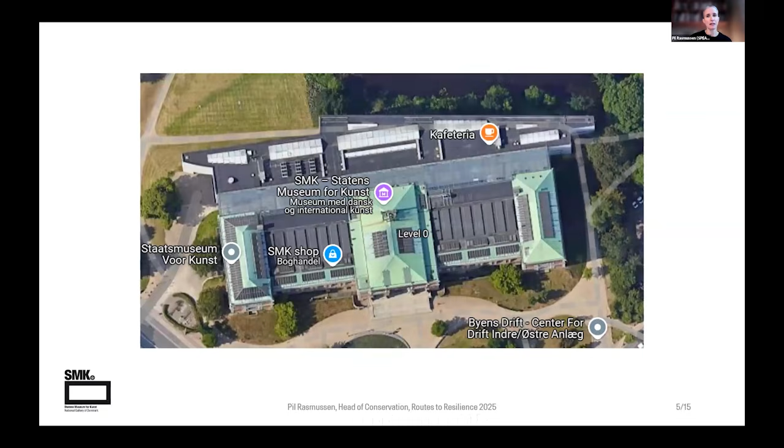I've also included a view from above. What you see here is the original building, which is quite a classic kind of museum building from this time in Europe. These two areas used to be a light well, or a sort of internal courtyard, and they've been covered up around 1970 to make more room for display.

This is the new building. You can see the lake here at the top, and connecting the two buildings is this glass-covered street, which is essentially a greenhouse. I'm mentioning this because in a minute I'm going to go into some climate control readings from experiments, and you will see that our main problem is keeping the temperature down. The building is not very well able to be cooled down because of all the joint building mass we've added over the years.

Briefly going over the sustainability efforts at SMK, we have followed the Bizot guidelines and the ICOM-CC and IIC recommendations from 2014 for around 10 years now, widening the environmental parameters for our own collection. We are also urging lenders to accept the same. This year, right now, is actually the first exhibition we've had with external loans coming in where we were able to get all lenders to accept these wider environmental parameters. So it's taken us 10 years from when we started this work with our own collection to being able to do a special exhibition with the same parameters.

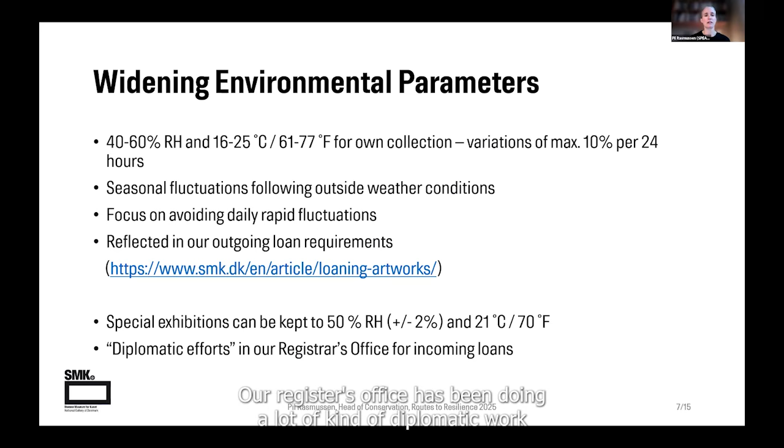Our registrar's office has been doing a lot of diplomatic work for incoming loans over the years. The Getting Climate Control Under Control program that I mentioned before.

We took part in this program because the Danish Association of Museums, part of their secretariat is the Green Museum Academy, who work to help museums work more sustainably. And they have been working with Ki Futures, the International Coaching and Training Network for Sustainability, to try to help museums overcome the barriers for making a change towards more sustainable climate control parameters.

There were 10 Danish museums participating in an 18-month project, and I believe this is also going on in other parts of the world at the moment. Our project is finished now, but we're working still internally in SMK with all the learnings from that.

We did have some barriers to how we could work along the way because we had an arbitration case surrounding a refurbishment of our HVAC units. We couldn't touch the system controls and programs for that, but we could do shutdowns of the units. We did that in 2 areas.

One was 6 connected exhibition rooms, and one was a storage room. So the 6 rooms were serviced by one HVAC unit and the storage room by another.

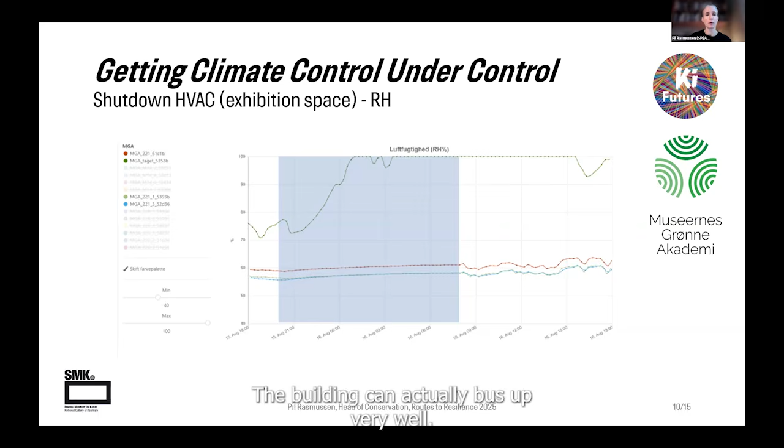I want to also emphasize some of the barriers that we've met in working with this. The first one I want to mention is the lack of resources, obviously funding for purchasing data loggers, equipment, whatever, but also a resource in terms of staff. Working with this requires time to look at all the results, to consider, to meet, to discuss and agree on how to move forward.

A barrier could also be documentation, or a lack of documentation, of historic climate conditions in the building. Another barrier could be just trying to work against the building, trying to make it do something it's not suited for, for instance in terms of climate control. It could be differences in approach and focus across specialist fields.

This kind of work requires collaboration between conservators, building management staff, facilities management, heritage scientists, engineers. We all come into this collaboration with different notions of what's important, and presumptions about what's important. I think it's important to acknowledge these differences so they don't become a barrier to collaborating. Presumptions about lenders and peers would be another barrier, assuming that someone else will say you can't lend this artwork if you can't live up to these conditions.

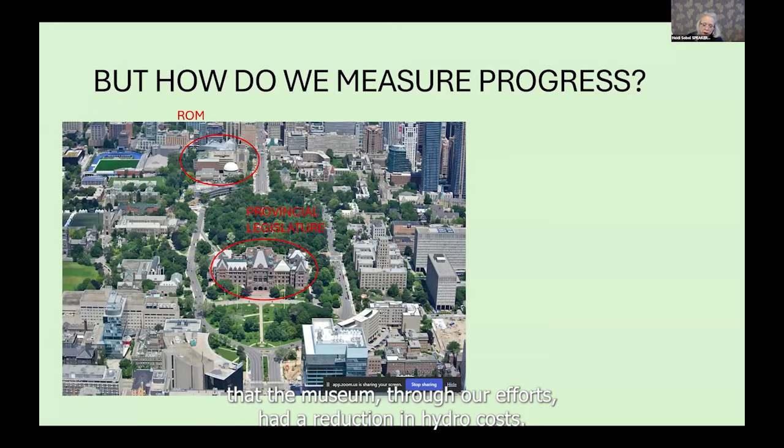So in our efforts over the past decade, we realized about a 30% reduction in those costs. However, and this is the caveat, due to our inclusion in something called the global adjustment.

The global adjustment is essentially a tax structure in our province, of which the museum is grouped into, that spreads energy costs throughout the provincial sector. So what does that mean? If we have a large consumer that's part of that consortium, the museum savings, all the things that we're doing, are not reflected in our bills. So in all of those efforts, we can't even tell in a financial sense what's happening.

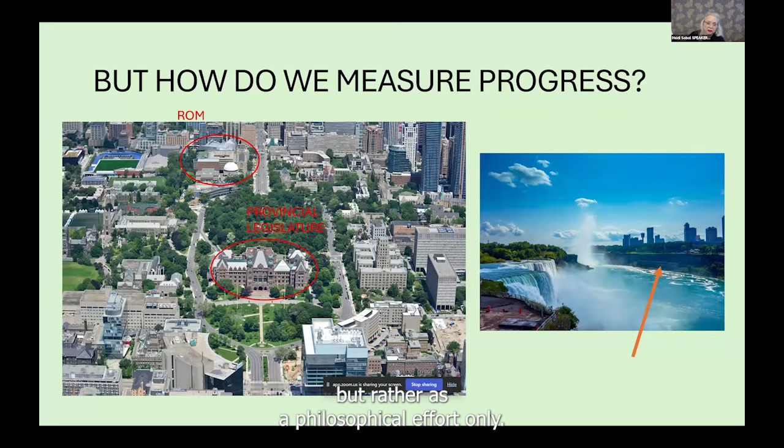So any motivation we do as an institution to reduce our carbon footprint cannot be seen in dollars and cents, but rather as a philosophical effort only.

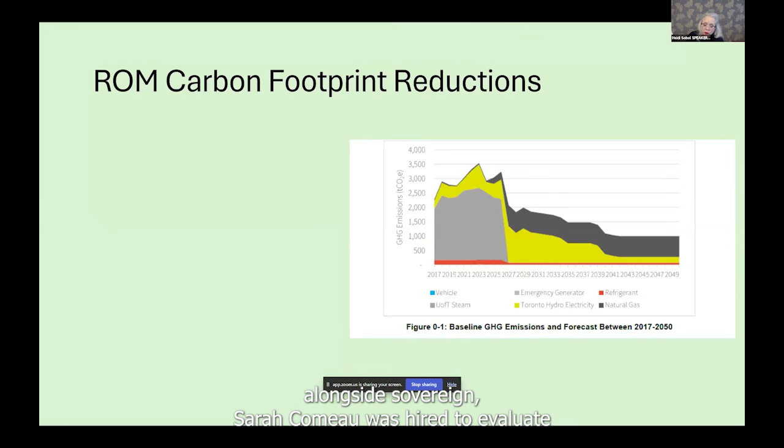So while we may not have financial statements documenting our efforts, we do have other ways to measure progress. Alongside Soren, Sarah Comeau was hired to evaluate and generate data to support our efforts. Pictured here is past and anticipated emissions by the museum. Partnerships with municipal agencies in the city of Toronto, like Transform TO, as well as private corporations such as Hatch Engineering, marked a pivotal shift in the museum, forging new community outreach in terms of sustainability and climate.

So you see what's happened. We've moved from focusing on what reduction measures we can do in terms of facilities, to looking at partnerships in our environment and our community.

While we cannot champion cost savings as a motivator, we realize that perhaps we can make change through one key tenet of preservation and conservation: climate control of museum spaces. Ubiquitous with museums and galleries is the notion of climate control—the manipulation of HVAC systems, heating, ventilation, air conditioning, to tailor temperature, humidity, fresh air, and circulation, so that optimal conditions are created to maintain the stability of our artworks, objects, and specimens.

ROM buildings are an amalgam of edifices from 1912 to 1932, 1978, and 2007. Each of these interconnected buildings have unique HVAC system demands, largely as a result of building materials, gallery placement, and the age of infrastructure. In 1977, the museum began to get museum climate, quote, under control.

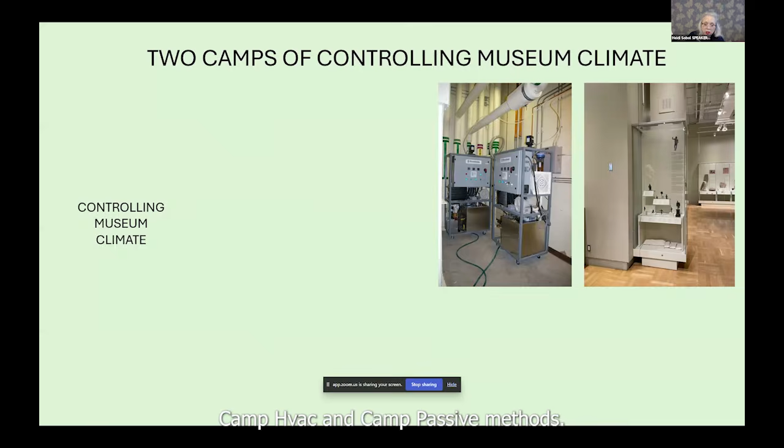And how do we control museum climate? I like to think of it as two main camps: Camp HVAC and Camp Passive methods. Camp HVAC relies on mechanical heating, cooling, chilling, condensing, and reheating of circulation of air. It does so based on defined set points within the machine, running headlong into system shutdowns and gallery visitors.

We have at least one million gallery visitors a year, give or take. And those gallery visitors in our climate are introducing humidity from things like wet parkas to snow-soaked knit hats, which we call toques in Canada, and of course are increasingly demanding climate change.

But there is a silver lining: the cheapest way to control climate is by focusing on dehumidification without temperature control. What does this mean? Essentially making storage spaces mainly focused on humidity control, not temperature, which is largely dictated by human comfort. So what we're doing is we're bifurcating our storage spaces.

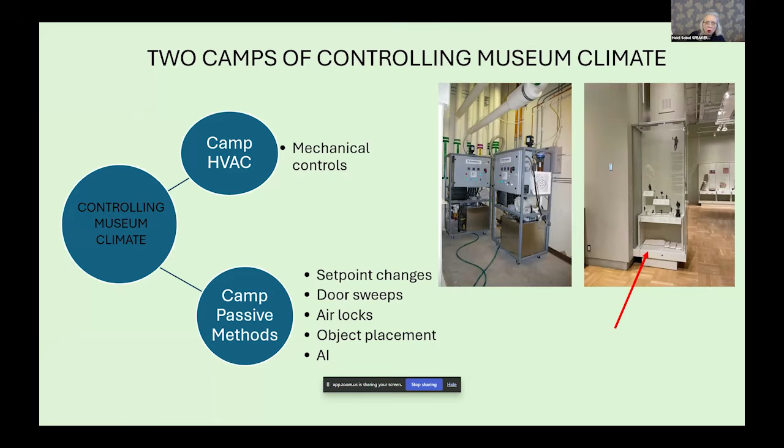Inner galleries have less temperature and RH fluctuations as you move in through the infrastructure. Perhaps the newest member to this camp is AI. AI can use data from building automation systems, BAS, and can anticipate hourly demands and head them off at the pass. It folds in exterior weather reports to modulate HVAC systems. It can consume previous years' data and extrapolate to future tweaks in systems. We're looking at proactive versus reactive.

Similar to PIL, our institution engaged as well in the Ki Culture Climate Program. We concluded just this past spring an 18-month participation in that pilot study with Ki Futures, entitled Getting Climate Control Under Control. Ki Futures is a global museum sustainability organization based in the Netherlands. It is intended to provide the collective museum sector a more inclusive and updated approach to museum climate set points, as well as adopting new cost-saving strategies.

Our ROM team consisted of an array of ROM champions. We had 500 staff, so there was a lot of interest in participating, and this resulted in a dynamic group playing active roles in these innovations. The Ki program also introduced us to allies throughout the globe. These contacts detailed the necessity for inclusivity in loan arrangements, as well as strategies such as guest sweaters for visitors entering cooler storage rooms, but with more stable RH, most certainly.

Our main tangible test: much like SMK, we staged those testing periods overnight. We also had HVAC and fan shutdowns in galleries, but also in our designated storage facility. The result was very similar - we saw no change in object conditions, which we maintained through condition reporting, and no discernible fluctuations in the museum climate, particularly the relative humidity.

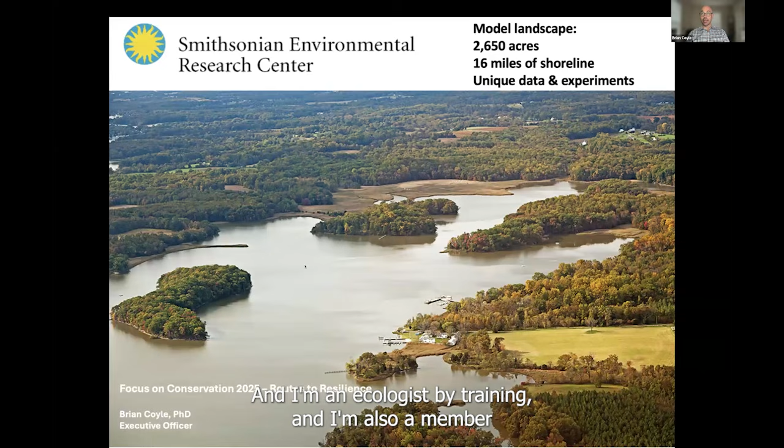And I'm an ecologist by training, and I'm also a member of the Smithsonian's Sustainability Working Group. In the past, I've participated in a number of sustainability initiatives at the Smithsonian, and I've become particularly interested in renewables and different ways that we might be able to achieve net zero goals for the entire institution.

So I'm excited to have this opportunity to share about sustainability and resilience at SERC. Today I'm going to walk you through our plan at SERC to become a net zero campus. This is a plan that we've had since before my time, really started in about 2009. And we've made significant progress, and we're really on our way to hopefully achieving that goal before the end of this decade.

Becoming a net zero campus would mean that we use no fossil fuels. Essentially, we generate no electricity from fossil fuels. We try to use only vehicles that are electric, and in all other sources too, we just use electrical or renewable sources. I want to give you also an overview of our holistic approach to sustainability, including nature-based solutions, environmental research and education, and especially the facilities and infrastructure.

So the presentation is divided more or less into 4 steps on our pathway to ever-increasing sustainability. And if you've never been to SERC, I'm sure many of you have not, I strongly encourage you to visit if you're in Maryland or in the Washington, D.C. region. It's a beautiful place. It's got a fascinating and inspiring history.

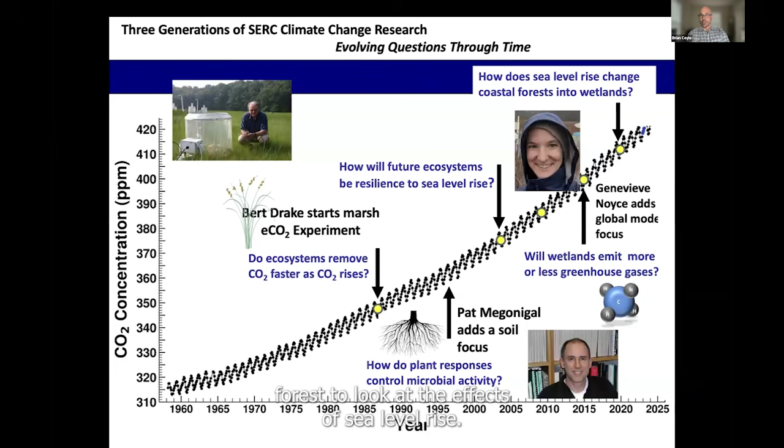On the other treatment, we use water from the river, which is salt water from the Chesapeake Bay, so it's brackish, and we flood another adjacent forest to look at the effects of sea level rise and how that's going to impact forest growth over time.

Another experiment that we have been doing, just one example of the many experiments happening at SERC, it is essentially one giant outdoor laboratory. So as people are walking around, the public are walking around seeing the nature and enjoying the green space, they're also able to observe all these different experiments we're doing.

So BiodiversiTree is an experiment, a 100-year experiment that we planted only about 12 years ago to look at the effects of diversity on trees and reforestation, to understand how best to do reforestation.

There are many efforts underway during this decade of restoration to plant trees around the world. One example, in the state of Maryland, is a goal to plant 5 million trees by 2030. The Nature Conservancy is also working to plant 1 billion trees. But the way the trees are planted makes a big difference, of course.

Planting monocultures versus planting diverse forests is going to make a difference, and many places may not understand exactly what the best way to do this is. So we are providing the evidence needed for these large-scale reforestation efforts to understand how to be most effective.

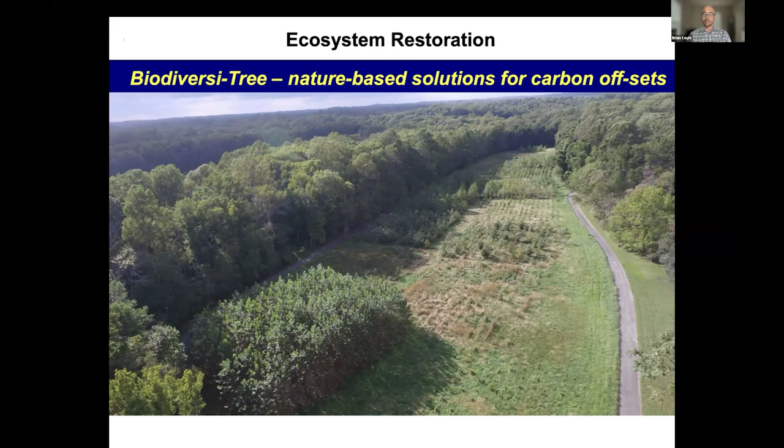SERC is also the head of the Coastal Carbon Network, where we are helping nations around the world, especially in the Mesoamerican region, to capture and understand the impact of restoration of coastal forest systems for mangroves and other blue carbon systems, understand how much carbon they're capturing, and train scientists and students on how to collect that data.

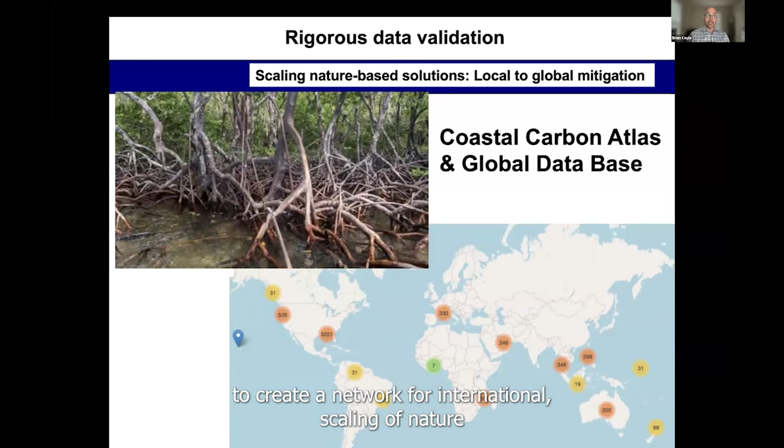We help them use that data to meet their commitments to international and national goals. SERC is kind of at the center of helping to create a network for international scaling of nature-based solutions.

Step 2 in our goal to becoming a net zero campus is really focused on facilities and a commitment to energy efficiency. In 2015, SERC took a major leap forward on sustainability infrastructure with the opening of what was at the time Smithsonian's only LEED Platinum building, the over 90,000 square foot Mathias Laboratory.

It's shown here. It's an elegant building that combines a variety of sustainability elements. The rooftop and adjacent parking areas you see there are covered in solar panels, and they provide much of the power of the building. There's also a passive solar heated water system, and the walls of the building are highly insulated, so it's very efficient.

In front of the Mathias is now a rich native plant meadow that provides habitat to diverse wildlife. Underneath that are 250 geothermal wells that provide the heating and air conditioning to the building and to adjacent buildings.

The windows are designed to be highly visible to birds in order to prevent mortality that often occurs as a result of birds colliding into transparent or reflective glass.

It also has rainwater cisterns that capture rainwater for irrigation, which we also divert into retention ponds to create more habitat. Much of the water used within the building is recycled in an on-site treatment plant for reuse.

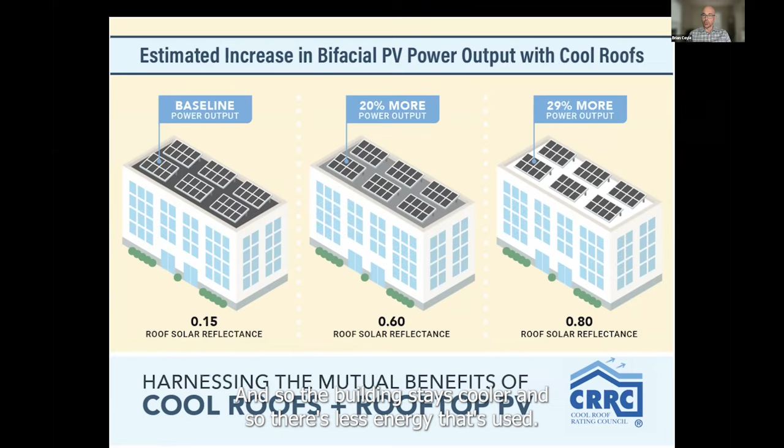Also the roof is essentially painted white and insulated. It's light colored, so it reflects a lot of the solar off the building, either into the solar arrays or back into the sky. So the building stays cooler, and less energy is used.

They can be vertically oriented, horizontally oriented, or set up on motors so they can adjust and track the sun. All of these have advantages for different types of agriculture, different food systems, or grazing with animals like sheep or cows. The system we'll set up will not only generate enough electricity to make us a net zero campus, where all of our electricity used by research and buildings is generated from photovoltaics, but will also allow us to do these experiments on agriculture.

And it's a benefit to farmers as well, because in the areas where farmland has become so valuable as real estate, many farmers are selling off their land because farm production alone isn't enough. But having this extra source of income will allow them to be financially viable. And so that's a major focus of the research and the dual use benefits of doing this agrivoltaic system.

So I think my time is up, and I appreciate the opportunity to present. I look forward to participating in the panel.

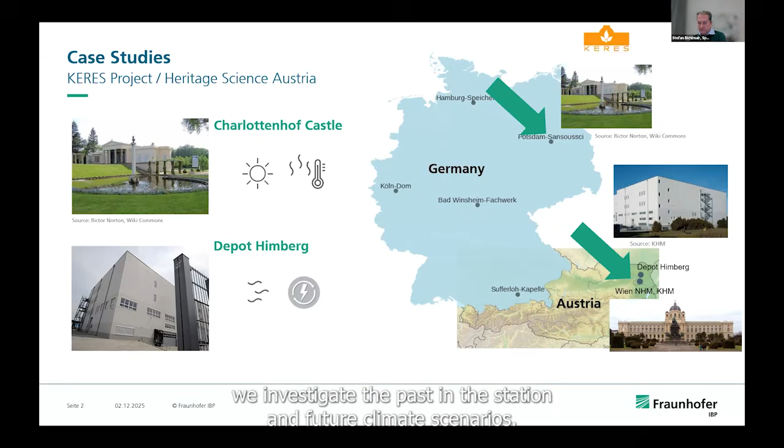So the first project was a Keres project, or the Charlottenhof was part of the Keres project, and this was about resilience and protection from extreme climate events. And the Depot Himberg was part of the project Heritage Science Austria, where we investigated pest infestation in future climate scenarios. How do we do that?

We use for the simulation a hygrothermal simulation tool. It's called WUFI Plus. On the picture right, you can see a simplified model, a house. We built in the software the building envelope, and the envelope will be hygrothermally simulated. That means it's not only a thermal simulation, but also a hygric simulation. We can also implement the HVAC or part of the HVAC with heating, cooling, humidifying, and so on, and also inner sources in case of museum buildings like visitors.

What we need is also the outdoor climate with temperature, relative humidity, sun irradiation, wind, and rain. With this boundary condition, we can simulate the indoor climate. And since we calculate the envelope hygrothermally, we can also take into account moisture buffering effects of the building envelope, but also of the implemented arts objects.

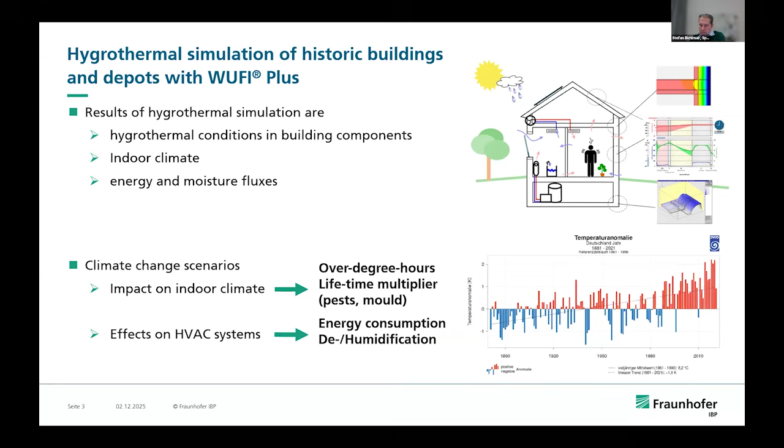This is the case study Charlottenhof Castle. The building was built in 1826 by the architect Karl Friedrich Schinkel, 200 years ago. To simulate, we need climate change scenarios, and these were calculated by GERICS, the German Climate Service Center, as part of the Keres project, and they calculated these projections for the local area of Potsdam. On the pictures right, you can see some scenarios.

These are 80 available scenarios for Germany and Europe, and here is an example. It is shown hot days, and on the graph below, hot and humid days. For the building simulation, we need hourly data, meaning we simulate in hourly steps, and therefore we need hourly data for the outside climate projections. Out of the 80 available climate change scenarios, only 10 models are usable for the building simulation.

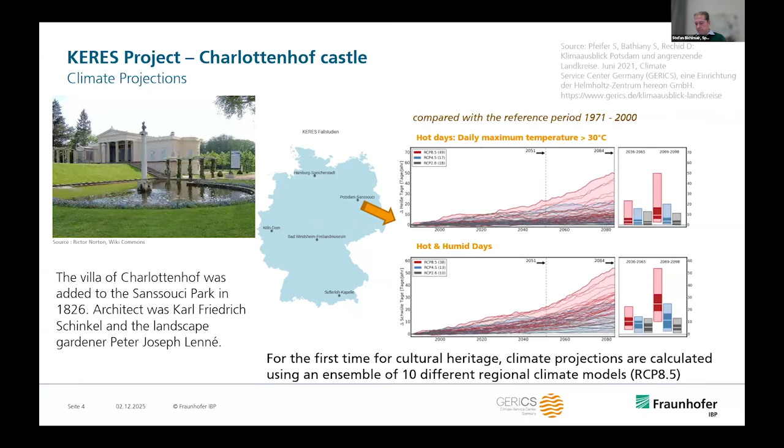So this is the methodology, the procedure for the building simulation. First of all, we have to inspect the building on site to understand it in terms of building construction and how the building works, and we have to do some data collection to measure the indoor climate.

After that work, we draw a CAD model and export it to WUFI Plus. The image in the middle upper image is the WUFI Plus model. It's a simplified model, but it is important to implement the building envelope as good as possible, comparable to reality.

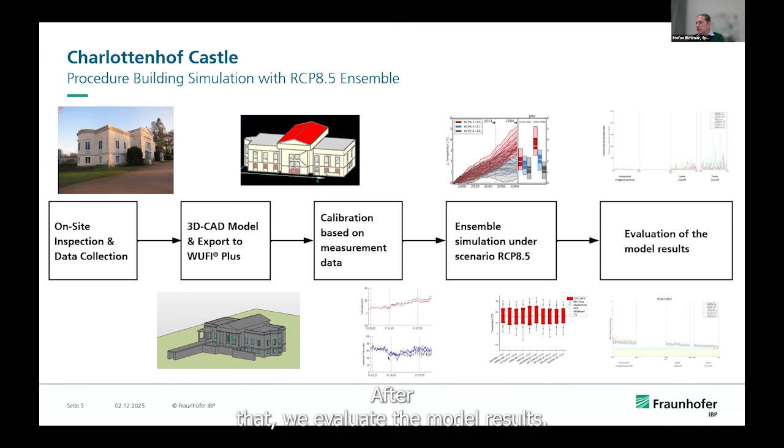After that followed a phase of calibration based on the measured data. So we compare the simulated indoor climate with the measured data. After that, we run the ensemble simulation with the RCP 8.5 scenario, and after that, we evaluate the model results.

Here we can see two graphs. The upper graph is the temperature course inside the measured data, and for the validation, we compare the simulated result. You can see two lines in the temperature graph, and they are very close together, meaning the simulation gives a very good answer, very close to reality. In the graph below, the blue line shows the relative humidity course, a measured one and the simulated one, and it's quite a good simulation result.

So it's a kind of validation, we also say calibration of the model. So we can be sure that the model works quite well. The table shows some statistics on comparison of measurement and simulation, and these are the first results.

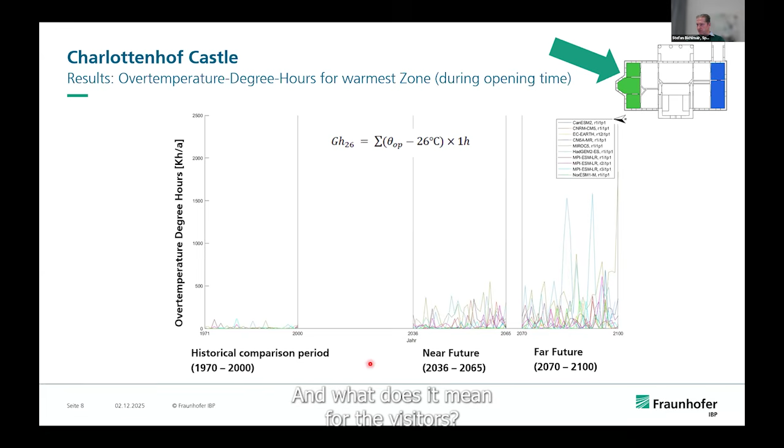And if we look to the period of the near future, I'll use the laser pointer. So here's the near future. We can see what we already experienced: it's getting warmer, and it's rising. The temperatures are rising, and we experience quite a lot of over temperature degree hours here. And in the far future, the temperatures are even rising more. So this is a result. For decision makers, they have to think how to deal with this information in future days, and what that means for the visitors.

So we have now temperature and relative humidity, and with this data we can calculate the lifetime multiplier. In this lifetime multiplier, the relative humidity goes in, and also the temperature, and the activation energy - this is a material constant to describe the sensitivity of the material in terms of chemical reactiveness. Here we see different materials: silk, paper and wooden furniture. These different materials are in the building. And we see here for silk, for the historical period, the lifetime multiplier is above 1, and the lifetime multiplier should be above 1.

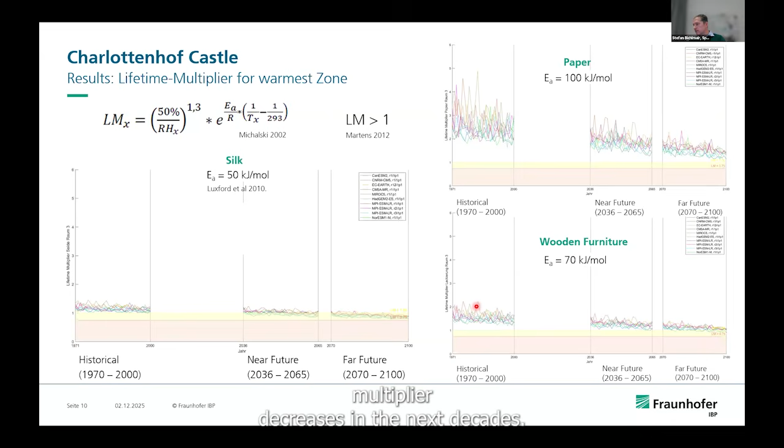We come now to the second case study, the Depot Himberg in Austria. These are climate change projections from the Austrian institutions. Here we had the problem that we couldn't get a climate change scenario in hourly data. They have many climate change scenarios, but only with daily mean values. So we have used a model developed in the project Climate for Culture. This is an RCP 4.5 scenario.

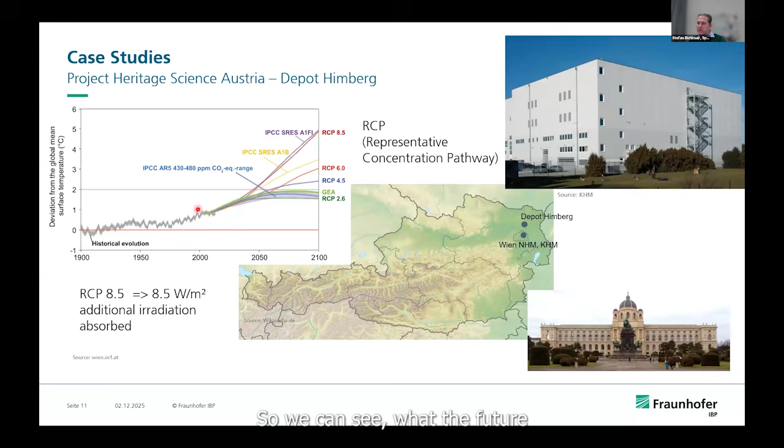Here the different scenarios are shown, and right now, as far as I understand, we are on the way between RCP 6 and RCP 8.5. That means we are not able to reduce CO2 emissions enough, and therefore we are on that way. We will see. To understand what will happen in a climate change scenario, RCP 4.5 is also good to use, so we can see what the future could bring to the depot.

Here we see again the simulation results, the green lines compared to the measured values. The relative humidity is very tightly controlled. They have a full HVAC system, and in wintertime they go down a little bit with relative humidity, but in a very tight, narrow corridor of 48 to 54%, meaning plus minus 3 something. This is measured data, so they have this constant climate.

Also here on the temperature, you can see very constant climate. Only in wintertime they go down to 18 degrees. In summertime it's something about 20.5 degrees.

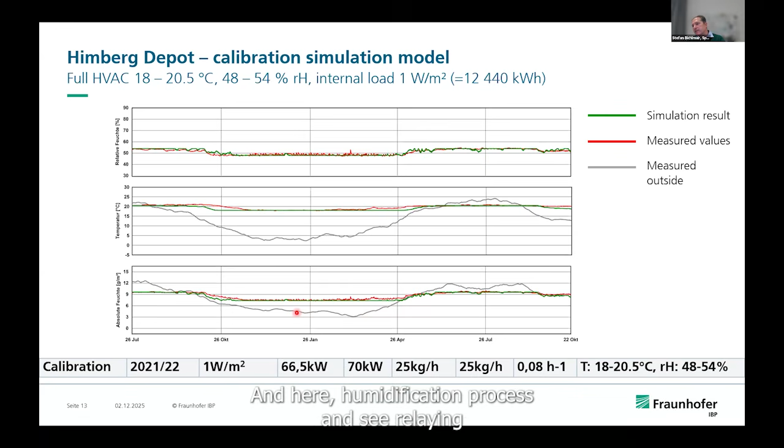Here we can see the absolute humidity, the simulated one and the measured one, where the simulation delivers very good results. We can see here a dehumidification process, and here a humidification process, and the gray line is the outdoor absolute humidity. These are the results of the simulation.

Here we see again on the left side the historic comparison period, in the middle the near future, and on the right the far future. Here the heating power is shown. Each bar stands for 1 year, so we have some variation from year to year. We see the energy consumption, and we observe that for the near future and far future, the heating demand will decrease.

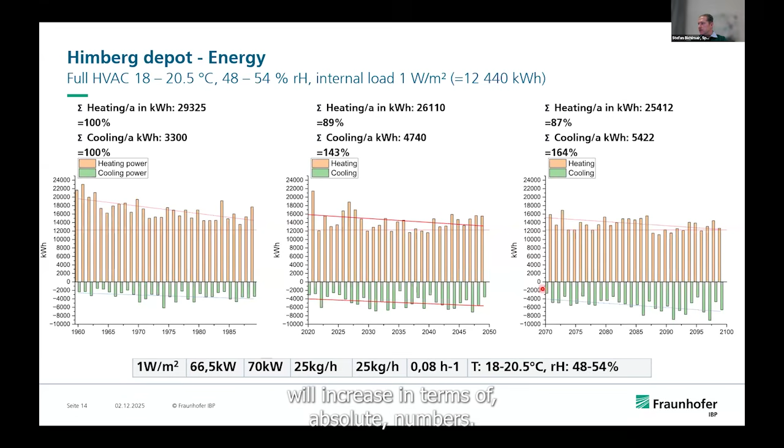But what we also can see is that the cooling power will increase in terms of absolute numbers. It's almost doubling.

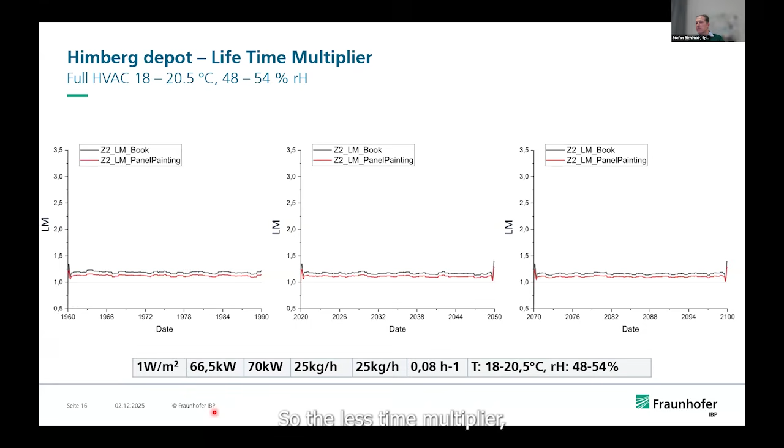Here the lifetime multiplier, and we can see it's well above 1, and it doesn't change, and that's clear. It's fully controlled by HVAC, so there is no change in the indoor climate, and so the lifetime multiplier is the same. So we were interested in how to save energy for this modern building.

We assumed a lower temperature, a new climate corridor, to allow the indoor climate to cool down in wintertime to 10 degrees Celsius. And we widened a little bit the relative humidity corridor to plus or minus 5.

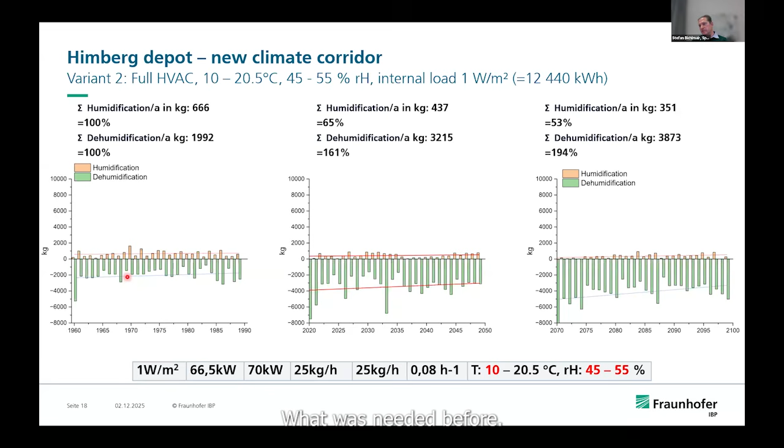For the humidification and dehumidification process, we see a drop in humidification need, only a 10th or so of what was needed before, but the dehumidification process is still necessary, and it's doubling like we have seen before.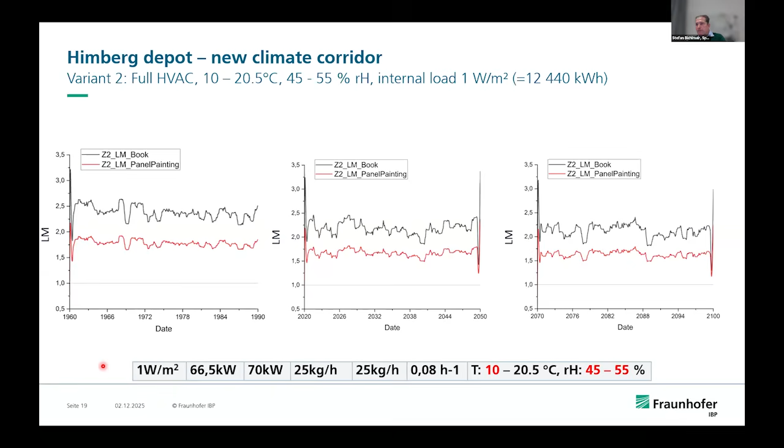As a conclusion, the ensemble simulation gives insight into possible benefits for indoor climate. During opening time, the over-degree hours increase for Charlottenhof, and the lifetime multiplier decreases for some materials below 1. For Himberg, with the full HVAC and tight climate corridor, the lifetime multiplier stays above 1, which is good. Less heating and more cooling demand will be required in this scenario, and less humidifying and more dehumidifying, almost doubling, will be required.

Comparing the tight temperature range versus the wider temperature range, we can observe energy savings of up to 50% are possible, and the need for humidifying drops to 1/10.

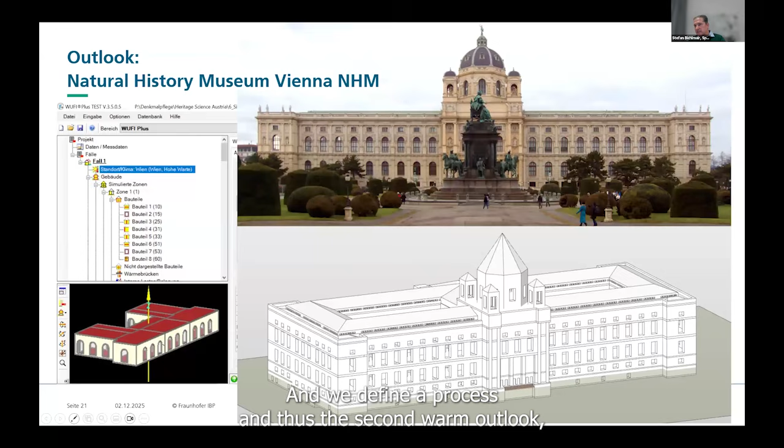As a short outlook, I want to present the Natural History Museum Vienna. We are running climate change scenarios right now, also with the RCP 4.5 model, investigating energy demand and the humidifying and dehumidifying process. As a second outlook, the Depot Wasserburg, also located in the south of Germany - we have calculated energy demand compared to different climate corridors, and now we are measuring the energy performance of that building to see if it reaches the calculated energy level of a passive house depot. Thank you very much.

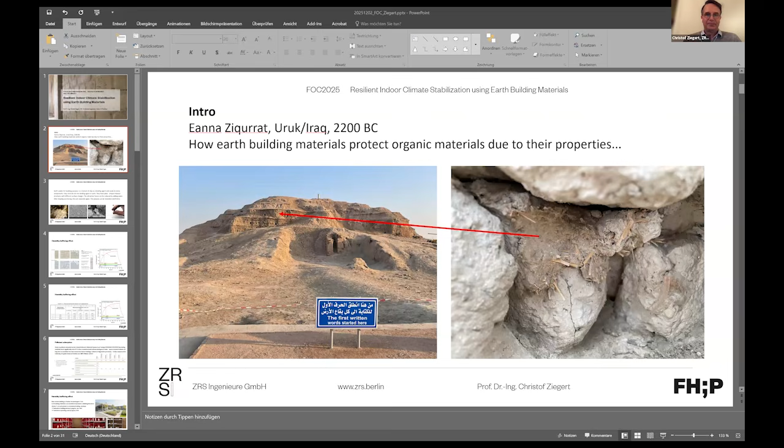I will speak, thank you for the invitation. I will speak about the resilience of indoor climate stabilization using earth building materials. We are not specialists like Stefan in simulation of the indoor climate. We are specialists, architects and engineers, who implement this in the building process to create the architecture and engineering design for this.

I'm just coming from Uruk in Iraq. Yesterday I was there, and you see there a very, very old earthen building. It's the Eanna Ziggurat in Mesopotamia, Uruk, from 2200 BC.

We worked there, I did conservation works, and you see on the right picture the condition of the straw which is in the earthen mortar. It's yellow and in very good condition. The specialist for organic material, from the Deutsches Archäologisches Institut who was with us in the team, was shocked at how good the condition was, and they took samples of grains and so on. This means the earthen building products, because of their very special humidity behavior, are conserving organic materials. That's good for us as humans in a building, and it's good for the things that are in the museum.

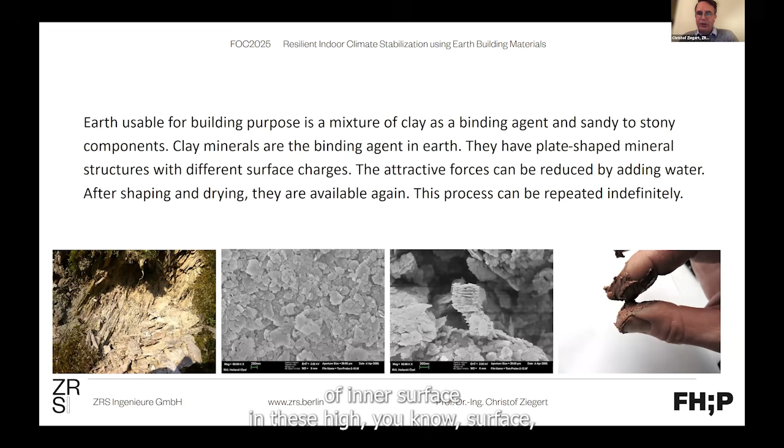Short introduction: earth building materials are a product of volcanic rocks and erosion products, and the clay minerals acting as binder in these earths are very, very small. In 1 gram, you have up to 1000 square meters of inner surface, and this high inner surface, which is not baked together like a brick, or glued together like cement, has an incredible inner surface with loaded mineral surfaces. These inner surfaces are able to absorb much more humidity than other building products.

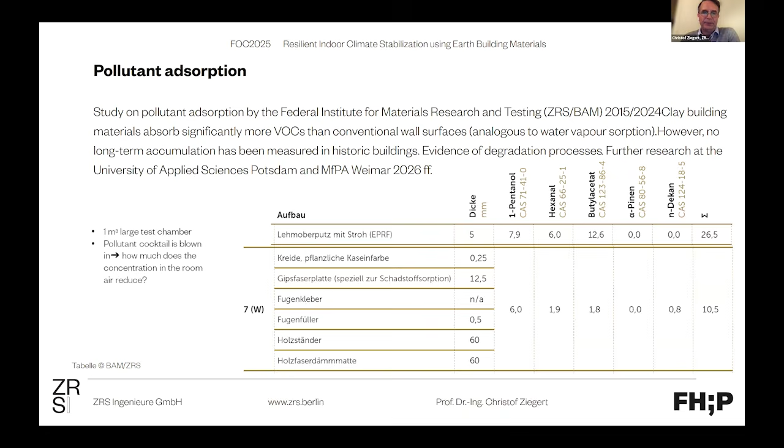There's another effect of this incredible high inner surface with the loaded particles: a cleaning effect on different pollutions, especially VOCs. There were different tests by the Federal Institute for Materials Research and Testing together with our office. It shows that the absorption of these pollutants is, in some cases, 5, 6, 8 times higher than with other building products. So it's buffering of humidity and cleaning of the indoor air effect. So what does this mean for museums or archive buildings?

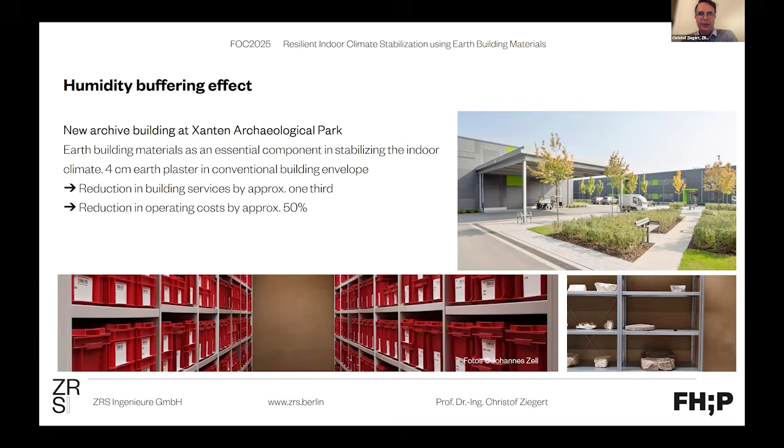They are the first buildings to use this effect in the design. Like Stefan explained, there are few offices and institutes able to make this design, calculating with the indoor climate effect of these earthen building products. Like here in the archive of the Archaeological Park of Xanten, they built a conventional envelope with 4 centimeters of earth plaster, and they reduced the climate control unit usage by 20-25%, when this machine normally runs at maximum around 50%. So the effect is huge, especially for archive buildings where the influence from outside is not as big as in a museum with a lot of visitors. But there are also simulations.

In Berlin, the Naturkunde Museum is already plastered with an earth plaster, and there are simulations for the next projects, like the Gropiusbau in Berlin.

The animals don't like the zigzag effect of the climate. They want to have these smooth waves.

So as I told you, my specialty is that we design and calculate these envelopes of these products.

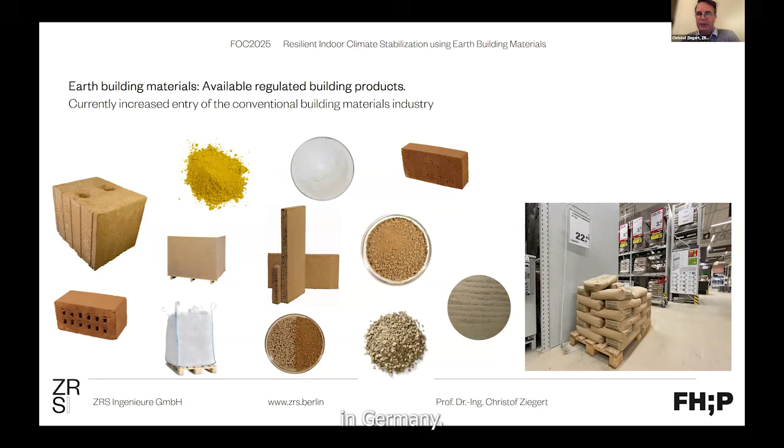The earth building products are available in Europe, especially in Germany. There's a growing industry for this.

As the first speakers, Pil Rasmussen and Heidi, announced, we will not only build sustainable for the things in the museum, we want to be sustainable for the environment as well.

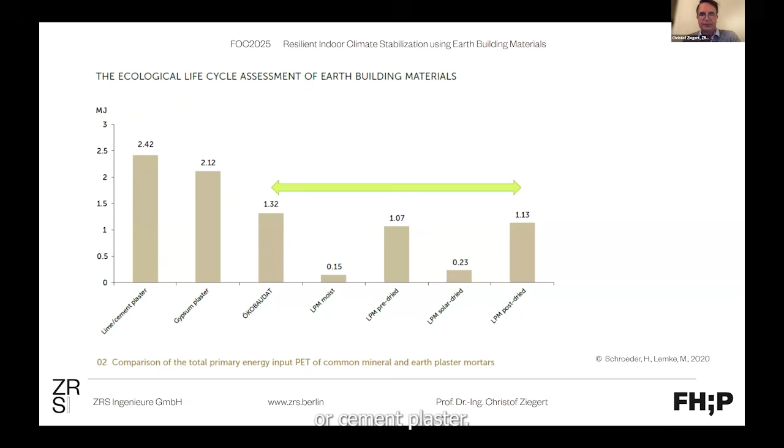As I announced before, we have DIN codes for these products and for their application. These DIN codes will be available in English from spring 2026, so they can be applied worldwide.

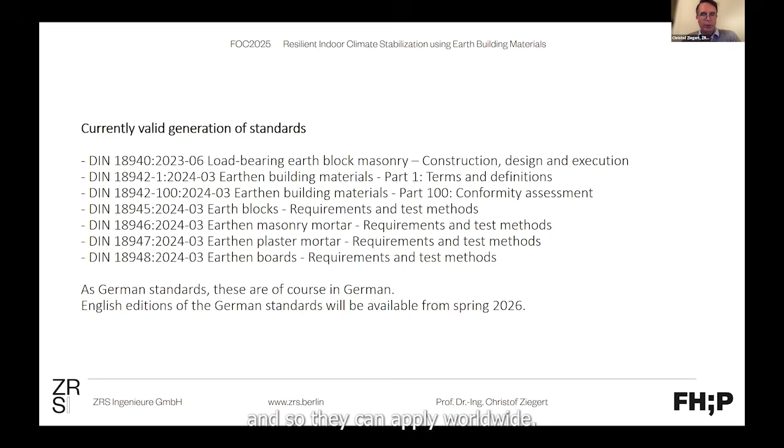In contrast to other countries, according to these codes it's forbidden to mix gypsum, cement, lime, or polymers into the pure earthen building material for so-called stabilization. If you stabilize it, we don't call it an earthen building product anymore, because the behavior totally changes — mixing in cement makes it more like concrete.

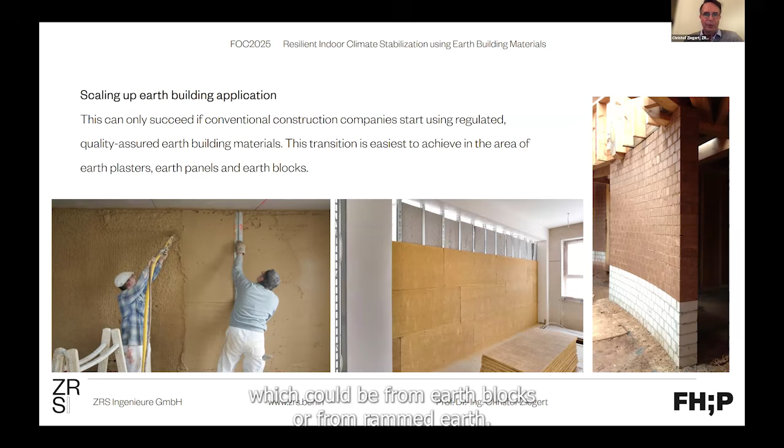Earthen building products are also applied for aesthetic reasons. Here is the Columba Museum in Köln, which was Museum of the Year in Germany, designed by Peter Zumthor. The whole museum is plastered with a grayish earth plaster, selected both for the design of the plaster and for its moisture buffering behavior.

On the right you see it's also used on staircases and similar areas where people scratch the wall, so these plasters hold up well to usability. They aren't fragile — they're good products even without stabilization.

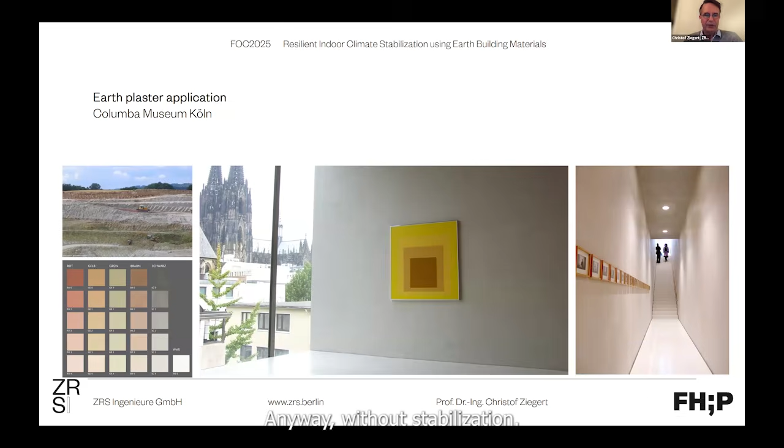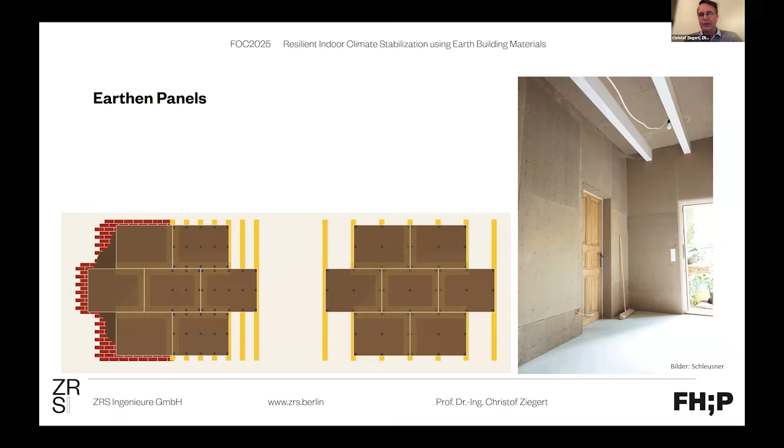So the panels are used very often in drywalls in Germany instead of gypsum boards, and there are special systems that integrate heating and cooling.

On the left, the red picture shows red pipes you can connect with these boards. In the middle and right pictures you see the board where you implement the pipes, then plaster over both systems. These boards can be used for both cooling and heating.

We implement these boards in office buildings, like here. You can be sure these products are tested according to German regulations — a sandbag is pushed onto these boards for testing, so nobody falls through such a partition wall in a difficult situation, and even hanging loads are tested.

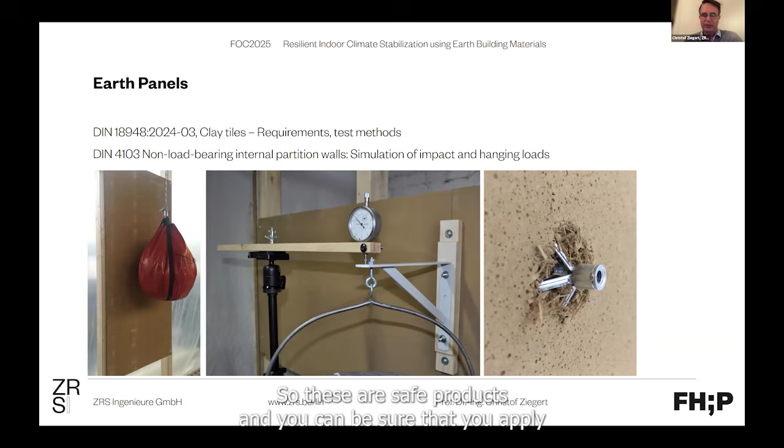So these are safe products, and you can be sure that when you apply them, you're on the safe side.

We often build wooden structures and fill the outer walls with sustainable insulation materials, and the inner walls, for buffering the climate, with earth blocks, as you can see here in this floor from a school. These walls are separated in function: the outer wall is for buffering the temperature from outside to the inside, and the heavy partition walls inside are there for buffering the temperature and humidity inside.

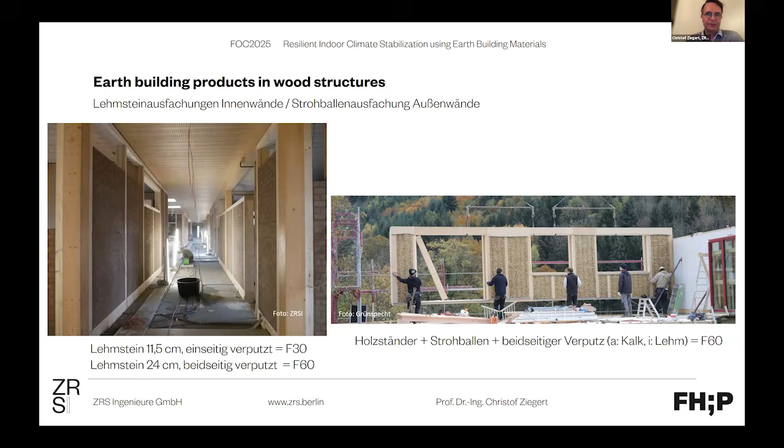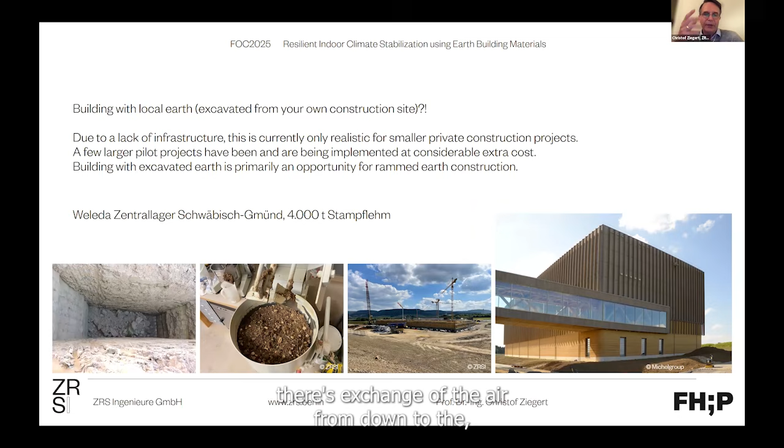This building needs no heating or cooling in the year. There is only ventilation, so that in this high building there's exchange of the air from down to up.

With the rammed earth wall, there's a special effect that noises also go down because of the porosity of the surface. The women at the desk in this museum always say that even with 3 school classes, it's a quiet environment.

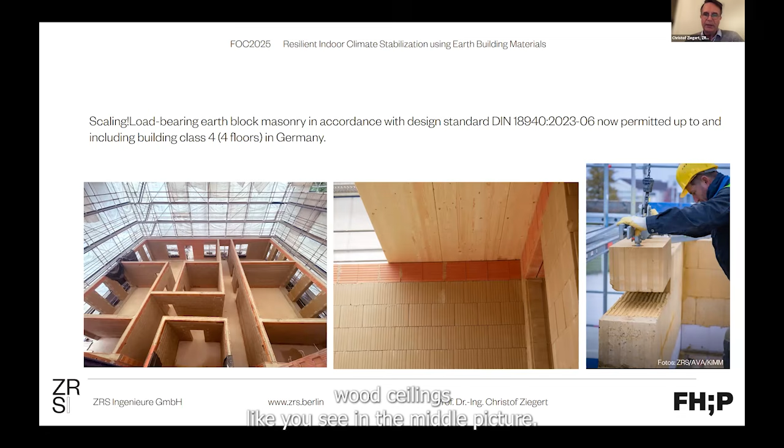A cheaper way for solid earth walls is earth block walling. It's allowed in Germany for up to 4 stories now since '23, and it's often combined with solid wood ceilings, like you see in the middle picture. The strength of these earth blocks is as high as fired brick, as you can see in the shear strength testing, where it crashes in the same way as the bricks.

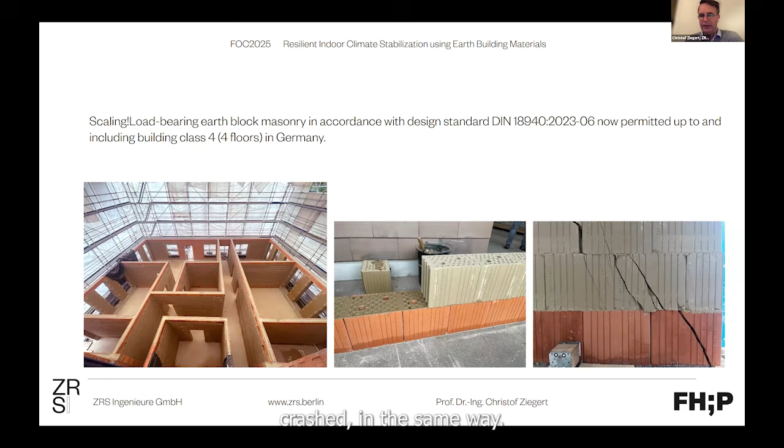If you are lucky and have an earth building existing, you can change it. We did this here in the Jahili Fort Museum in the UAE, with a modern design giving it a new look, and the indoor climate is incredible.

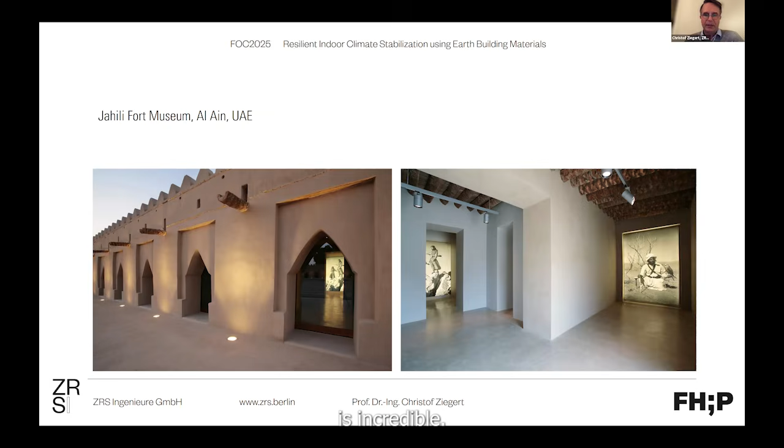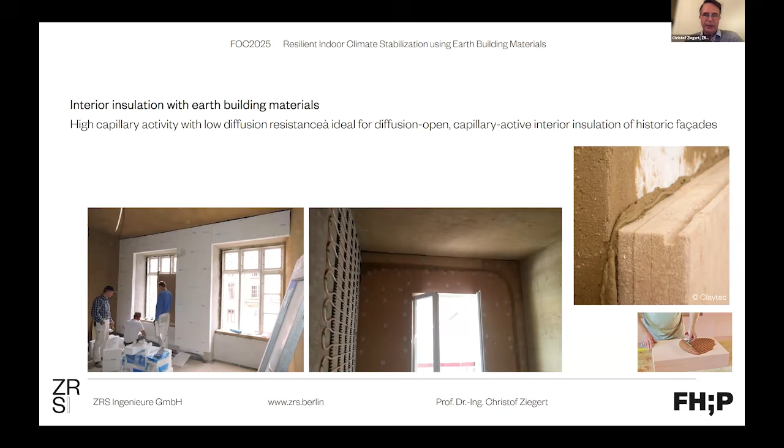Another approach is inside insulation with earthen building products. Here's a very old residential building where you can clad the inside of conventional brick walling. You glue earthen mortar with special insulation materials like wood fibers or foamed minerals inside on the wall, and the special moisture behavior of these earth products and insulation materials can buffer condensation and keep the wall healthy.

So this is after plastering with earth plaster, and the people are lucky, the building is healthy and has won a lot of awards.

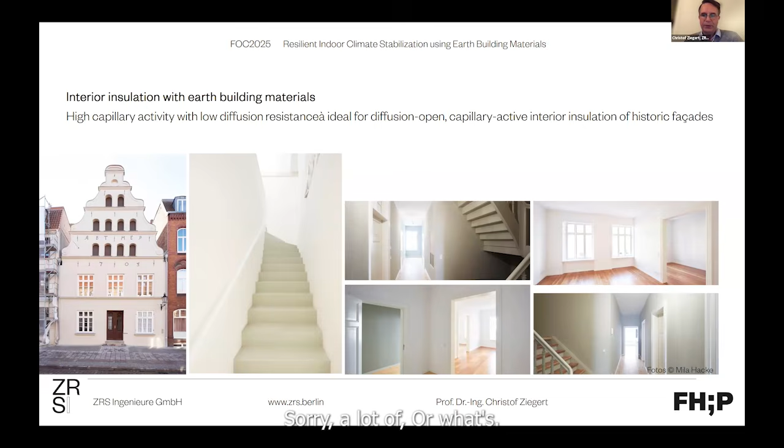So as you can see, earthen building products are well known in Germany and internationally. It's not a new thing, it's a very old technique, and all the people living in or using earthen buildings and earthen building products are happy with the indoor climate. Thank you.

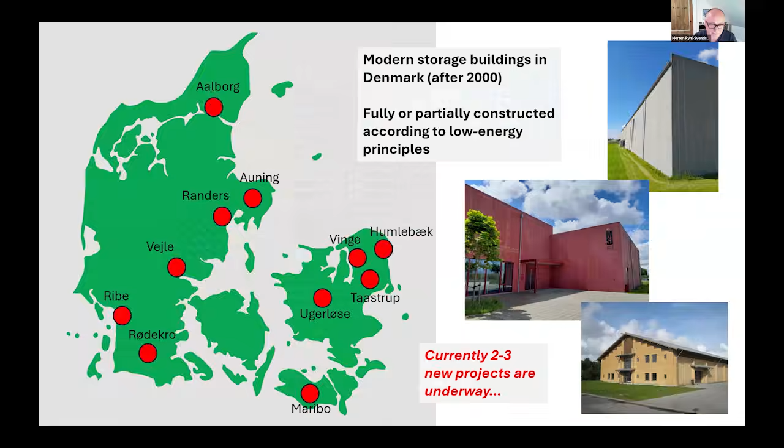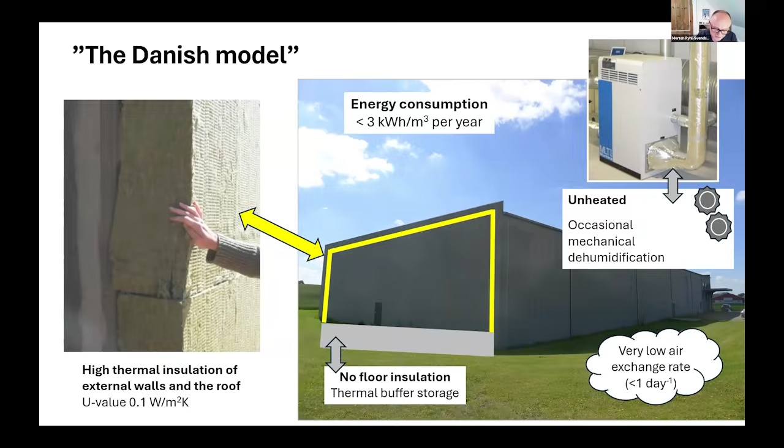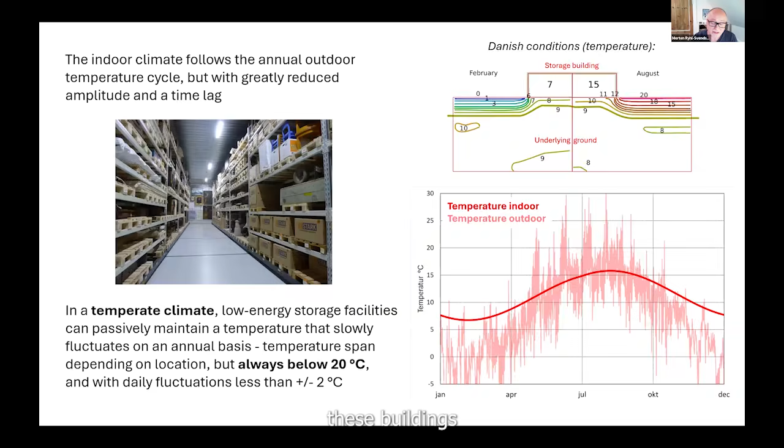I will briefly present the experience we had here in Denmark with regard to low energy solutions for storage. Over the last 20 years or so, more than 10 modern storage buildings have been built, several as shared facilities, contrasting sharply with traditional HVAC operated buildings. The concept is characterized by passive temperature regulation, high thermal insulation combined with a large thermal mass inside the building, very low exchange, and when necessary, mechanical dehumidification. This gives, in a northern temperate climate such as Scandinavia, a cool indoor environment where the annual average temperature is close to what it is outside. These buildings perform quite well on all preservation metrics, and they do this for a tiny energy consumption.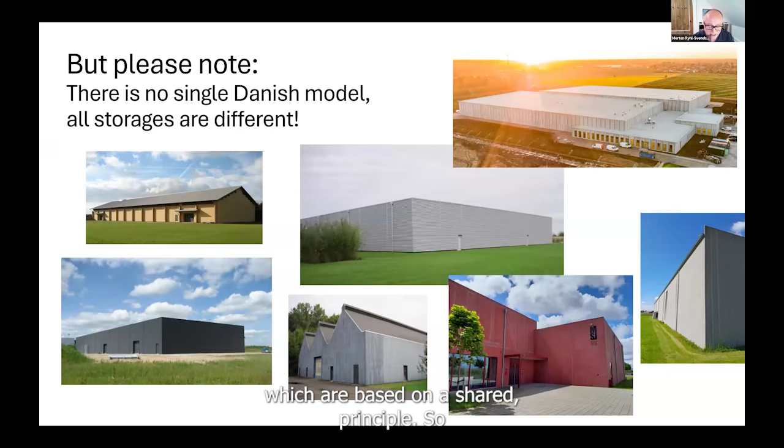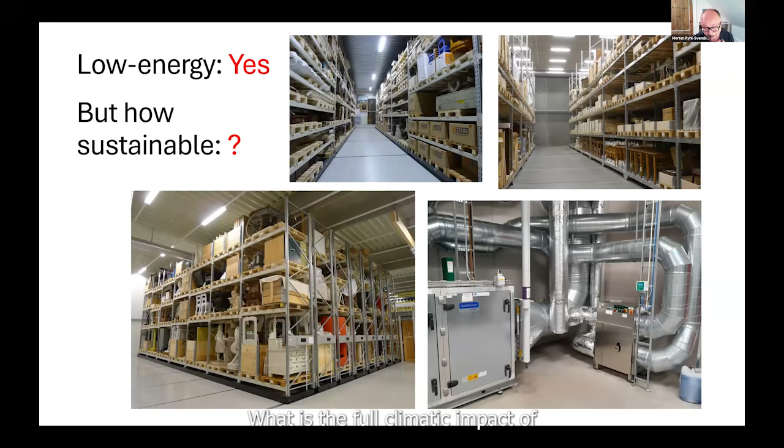I must stress that not two buildings are identical. The so-called Danish model is not a single design, but rather a family of buildings based on a shared principle. These buildings are indeed sustainable with regard to operation, running at very low energy consumption. But the question is, how is the full picture? What is the full climatic impact of such a modern building?

We have been looking into this by analyzing 6 modern buildings, all built within about the last decade. A typical modern museum building is mainly concrete, steel, and mineral wool. These buildings we investigated are all fulfilling the Danish building code requirements, even as they are being increasingly tightened year after year. However, one crucial point is how much shelving weighs into the life cycle calculations, really depending on if it's made from new or recycled metal.

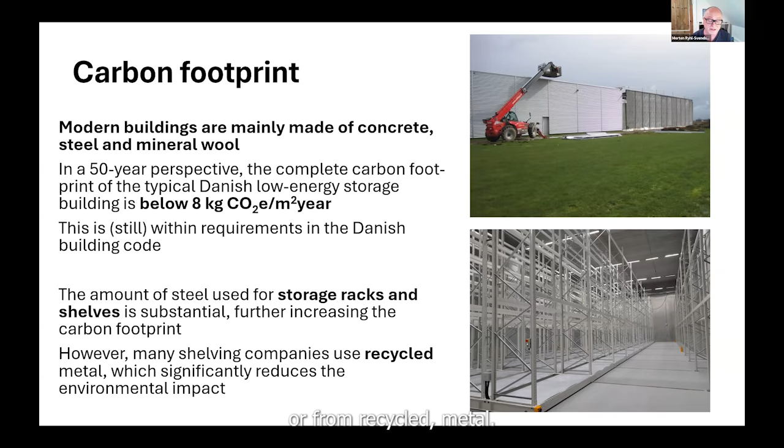In this survey, we took as an example one of the buildings, the storage building in Ugerløse in Zealand, Denmark, and we calculated how the life cycle impact of this same building would behave if it was made in different materials. We showed how the CO2 footprint could actually be halved by using wood and other biomaterials as part of the construction, as a substitute to traditional materials, especially steel and concrete.

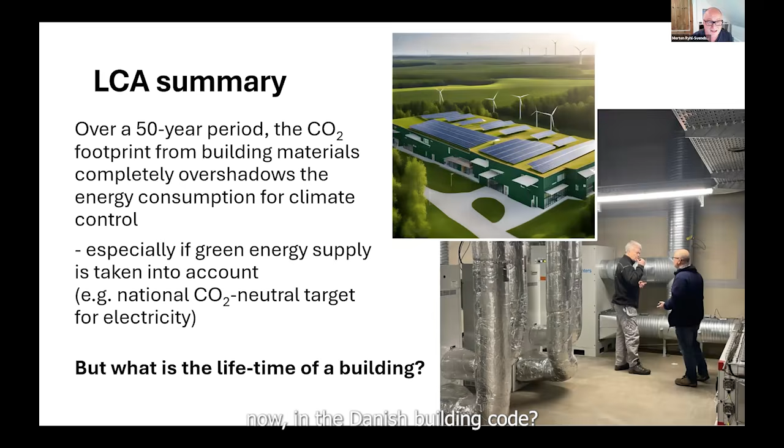But in any case, for this type of building, the CO2 footprint of the building itself largely overshadows the operational CO2 during its entire lifetime, which, by the way, is an open question. What is the lifetime of such a building? In the Danish building code, we use 50 years as a benchmark, even though we expect high quality buildings should last much longer.

No matter what, I must stress that the greenest buildings are those that we don't build. If we really want to lower the climate impact from museum buildings, we must concentrate much more on reusing the existing building stock, which is a subject my colleagues and I are now focusing more and more towards.

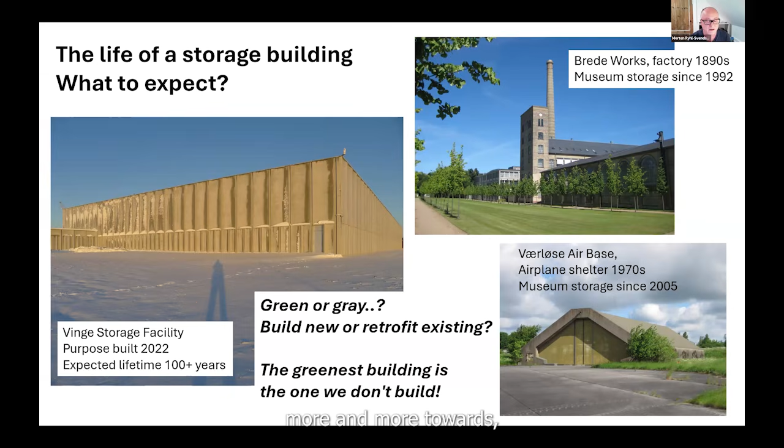Thank you, Morten. And if you just, there you go. Simon, if you want to jump in there with your slides, and you are muted, Simon. Yes, hi, there you go. Can you see me? Can you see the presentation? Absolutely, it's perfect. Great, all right, okay.

Hi everyone, it's my pleasure to join you all today from the traditional unceded territory of the Algonquin Anishinaabe people. CCI is an agency of the Department of Canadian Heritage, and we offer services, training, and research to over 2,000 heritage institutions of all types and sizes across Canada.

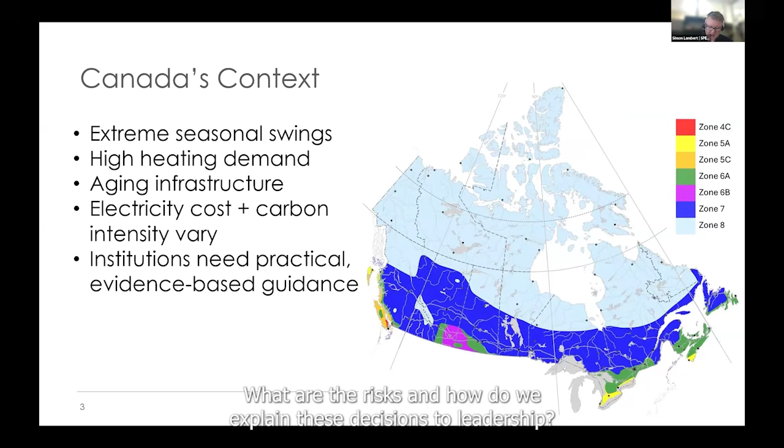During our consultations, institutions told us they wanted clear, evidence-based guidance. What can we safely relax? What are the risks? And how do we explain these decisions to leadership?

To guide this shift, we developed a working definition of sustainable climate control that balances environmental impact, social responsibility, financial viability, and preservation needs of collections. Not all institutions or communities will weigh these equally. The key is that climate control becomes context-specific, not a universal rule.

ASHRAE control types A through D are performance bands, not hierarchies. Type D, or simply avoiding damp, is already an effective, sustainable baseline for many buildings. Tighter control can be added when justified by collection needs and building capacity. This reframing is essential for low energy practice. It tells institutions that broader ranges can be legitimate, safe, and perhaps even preferable.

To help museums apply these ideas in real context, we've released updated climate guidelines, which includes various detailed sections along with two practical tools, the Climate Control Decision Tool and ClimaSpec.

The Climate Control Decision Tool is a short decision tree with a series of yes/no questions that consider collection sensitivity, based in part on material properties and climate history, Indigenous belongings, loan requirements, and other operational constraints to provide general advice. In this demo, we selected yes to every question to show you how it works.

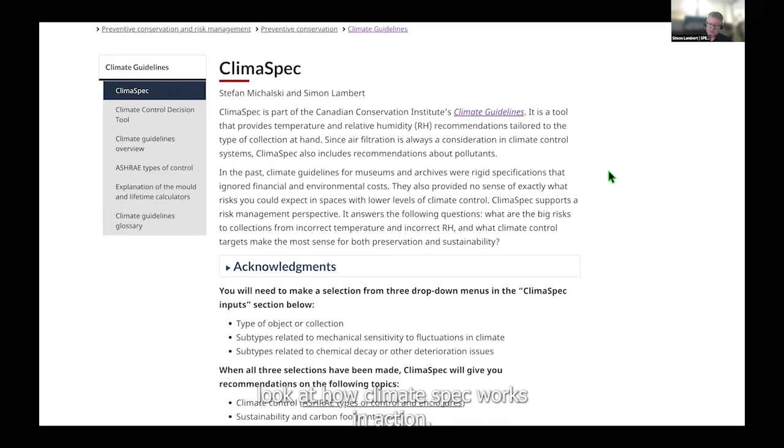Now let's look at how ClimaSpec works in action. To use ClimaSpec, you will choose from three drop-down menus: type of object or collection, subtypes related to mechanical sensitivity to fluctuations in climate, and subtypes related to chemical decay or other deterioration issues.

If, for example, you're considering a small museum with a mixed historical collection, in ClimaSpec you can select Mixed Collection History. In the second dropdown, we'll select 2, the climate history of the collection is unknown. You can click on Show Mechanical Examples for more detail about what this subtype means.

And in the third dropdown, we'll select 2, acidic materials. Again, you can click on Show Chemical Examples to help decide if this selection best fits the collection you're considering. When all 3 selections have been made and you click Submit, ClimaSpec will give you recommendations to consider on the following topics.

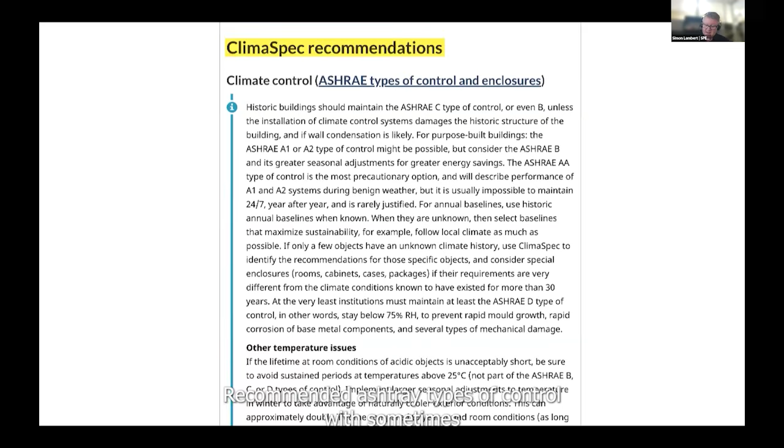Recommended ASHRAE types of control, which sometimes includes helpful sections about hazardous materials. You can see that there are hyperlinks to resources to further explore topics, and these links are found throughout the recommendations.

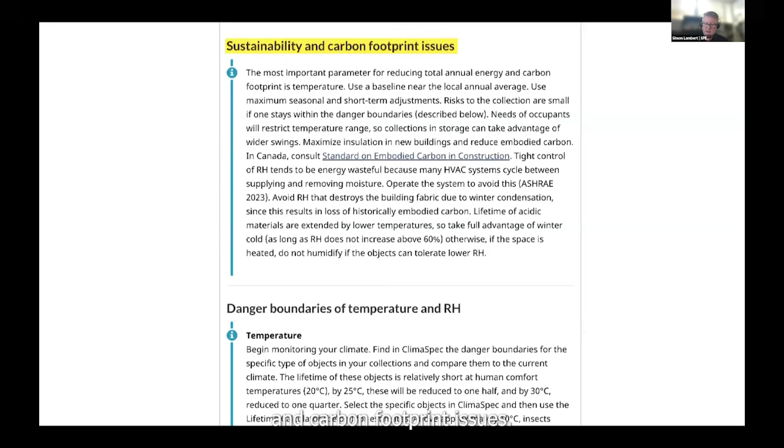Also, sustainability and carbon footprint issues, danger boundaries of temperature and RH, baselines of temperature and RH, sensitivity of objects to fluctuations, response time of object to fluctuations, sensitivity of objects to pollutants and recommended control, and approximate lifetime of organic materials at room conditions.

This will give you an estimate of years and describe the predicted state of the materials at that point. You can then use the lifetime calculator below to input specific conditions in your facility for the organic materials in the category you originally selected above to refine the estimate of remaining lifetime, as your facility's conditions may be different.

Lifetime is defined as the time, usually in years, for an object to deteriorate to a state at which it no longer has value or utility to the institution. So your institution will have to make a judgment on what end of lifetime looks like in your context. And finally, there is a mold calculator for relative humidities above 65%.

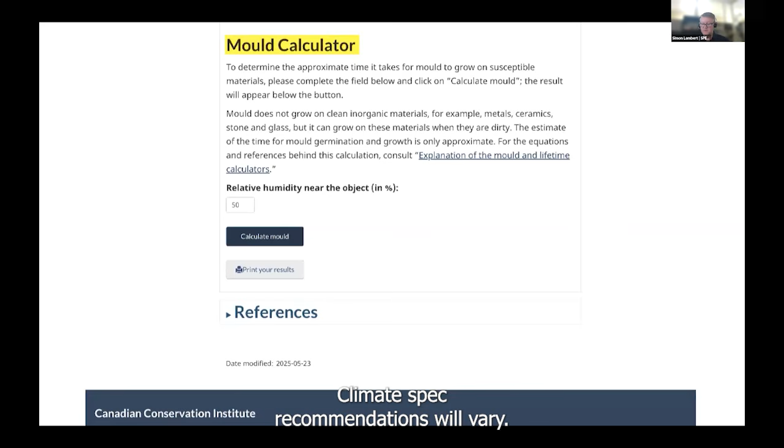You'll see as you try different inputs, ClimaSpec recommendations will vary. These recommendations are all evidence-based, so you'll find a full list of references at the bottom with in-text citations in the recommendations themselves.

To support this shift with real data, we're launching a multi-year case study with a partner museum. The goal is to identify the actual—I can say we've signed the agreement today, so it's the Canadian Museum of History. The goal is to quantify the actual energy, carbon, and financial impacts of broadening RH and temperature set points in a Canadian climate.

We will monitor RH and energy use for 12 months under current conditions, implement broader set points aligned with ASHRAE types of control, then monitor the same space for another 12 months. We'll track both whole building and component level loads—heating, cooling, humidification, and dehumidification—and analyze the energy performance, costs, and carbon impacts.

This project will address a major evidence gap, which is how much energy Canadian museums can truly save by updating their set points and allowing broader ranges for temperature and RH.

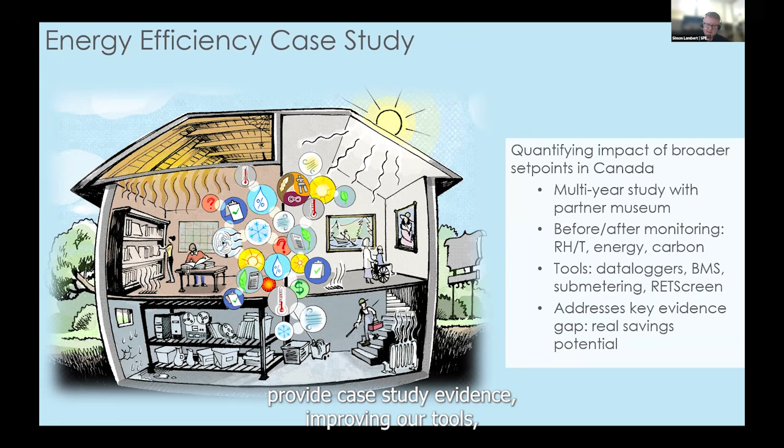The findings will directly support our dissemination strategy, providing case study evidence, improving our tools, and creating a methodology that other institutions can apply. With updated guidance, tools like ClimaSpec, and eventually real Canadian case study data, museums can make informed, sustainable, socially responsible decisions while protecting collections and reducing carbon footprint. Thank you, I look forward to the discussion.

That's wonderful. Thank you so much, Simon.

The one thing I just want to point out here is it's having these tools and having publications come out that is so incredibly important, since a lot of the information that's come out is so old or is very temperate climate based.

One thing that I think was interesting, and I really want you to be able to ask each other questions, but I want to get us started with - you were talking, Simon, about the life cycle of collections, but I'm also interested about the life cycle and lifetime of buildings. Looking at older buildings, maybe retrofitting buildings, and then modeling out into what we're doing and what we're going to be needing to do in the future. Can you talk a little bit about that idea of the lifetime of buildings or the life cycle of buildings? And then honestly, ask each other questions. Go for it. We've got another 15 minutes maybe to chat.